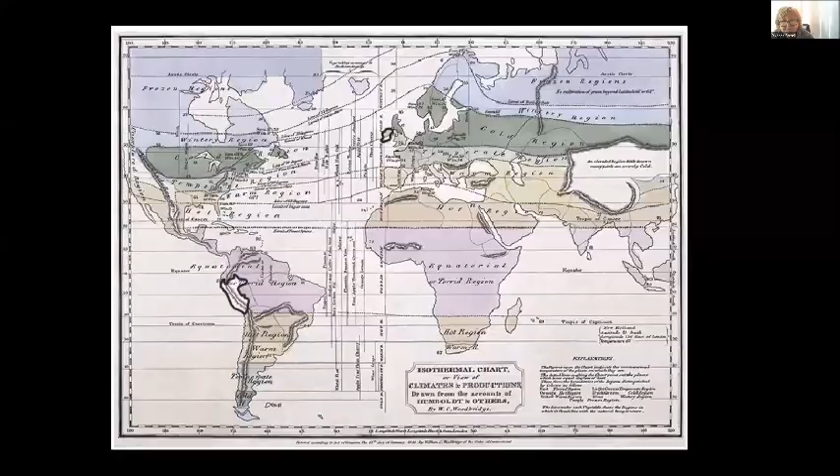But for us, and the discussion today about place, it's also about the future of sustainability and how buildings respond. The first project, which I will show, is one that we finished recently.

It's in the City of London. On the bottom of this image here is the River Thames down below, and then you also have the buildings around. These are the law courts, this part of the City of London. And we won a competition for a new university building that was on a site 55 meters facing onto a very ancient public space or open space in the City of London called Lincoln's Inn Fields.

And across the way from us was a very important architectural building. It's the John Soane Museum, which is a museum free to the public under Act of Parliament by Sir John Soane in his time. The house is now, if you like, a sample of his kind of architecture.

We were very aware that we were building a building with 55 meters, part of the whole enclosure of this public space. It was a competition, and when we talk about place and education and ethos, in terms of place, each project is trying to find some sort of kernel that anchors it in its location, so that each place magnifies the beauty of its difference.

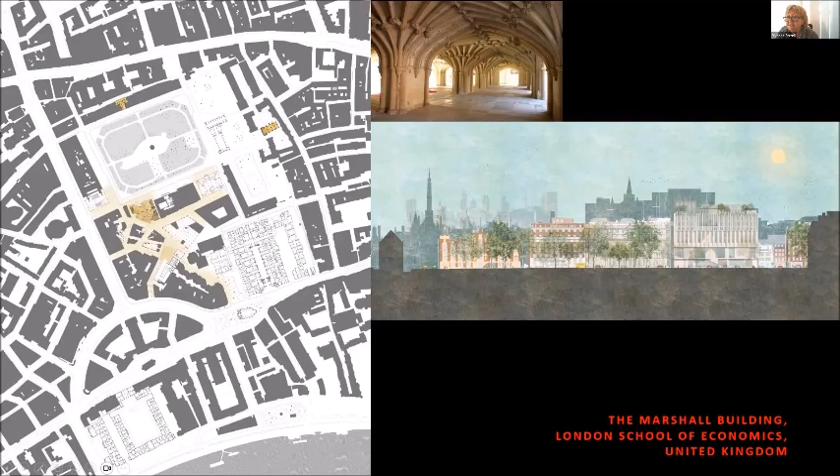What we did was separate what was needed. We pushed the teaching spaces up and the research spaces up, with the research institute on the roof. We put the big sports rooms down below ground, bringing light down to them, and we liberated the free space underneath, like the underside of Lincoln's Inn's little chapel that we made.

This is the structure that holds the building above, and you actually move within the structure. So here you're on Lincoln's Inn Fields - the ground is sloping slightly, going down to the River Thames, to the south. We made this public space where you move up through the building in terms of the research offices up to the roofscape, and down below is the big sports hall.

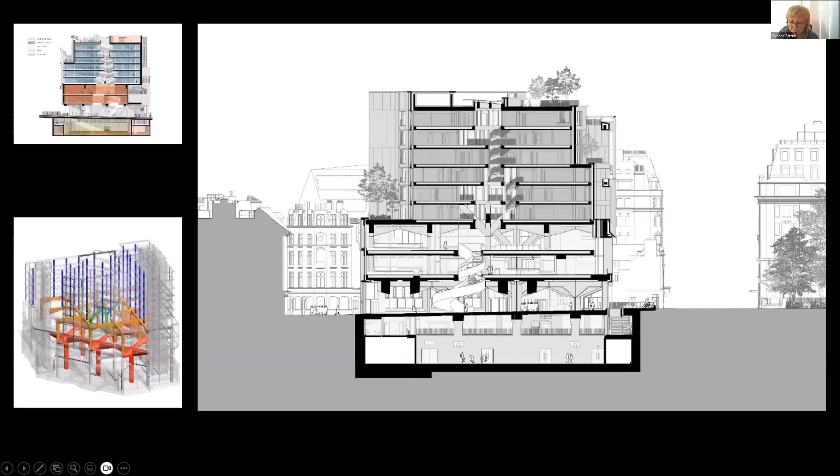So the smaller office spaces take smaller structure - there's 3 different kinds of structure in the building. Here we have the facade, which is the 55 meters of elevation to Lincoln's Inn Fields, the main entrance, the free space, the teaching rooms here, and the research offices up above.

One thing that's really important in this case is that because the facade was facing north, and because the sun is from the south, we didn't want a very dark, shadowy main elevation. So we made this like a lantern so that the south light could come through and shine into the northern space - you're down in the opposite, we have our sun to the south, you have your sun more or less to the north.

And also where we're using these fins to catch the western sun, to bounce light as deep into the plan. The second image is one of the other entrances that links into the streetscape of London. And here on the right-hand side, you're in the free space, the new space that was invented.

In terms of pushing the need up higher, the need down below, we make a space which is multifunctional. This is both an area for students to gather, a place where exhibitions are held, a place for lectures, but it has this multifunctional possibility within its repeated structure.

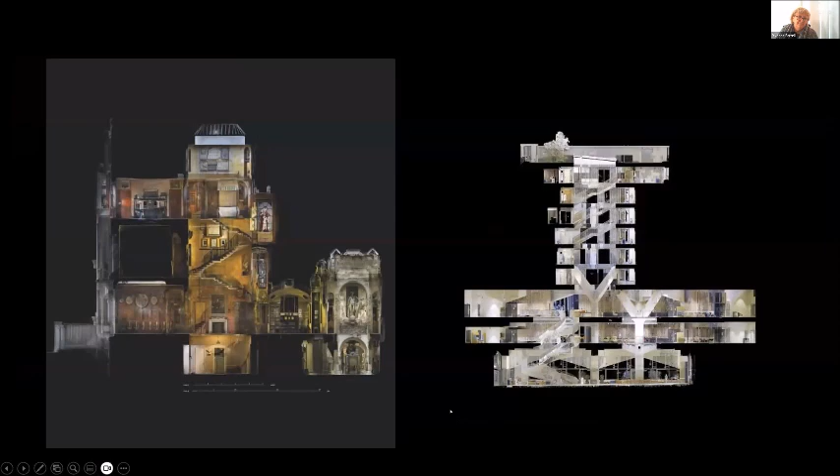I'll finish and hand over to Shelley in a minute. I mentioned earlier that across the space was John Soane's museum. He was a practicing architect, but also a teacher of architecture. This house has incredibly beautiful and intimate spaces as you move up through the building. This was a photographic section, which we thought was really very beautiful. It was at a time in London when the pollution was so dreadful that people could hardly see more than 10 or 15 meters.

The amount of pollution from smoke, from domestic fires and from businesses within the city really made it a dreadful place to breathe. One interesting thing about John Soane was that he was a very good friend of the painter Turner, and that friendship may explain the yellow color he used to brighten up the gloom of London at that time.

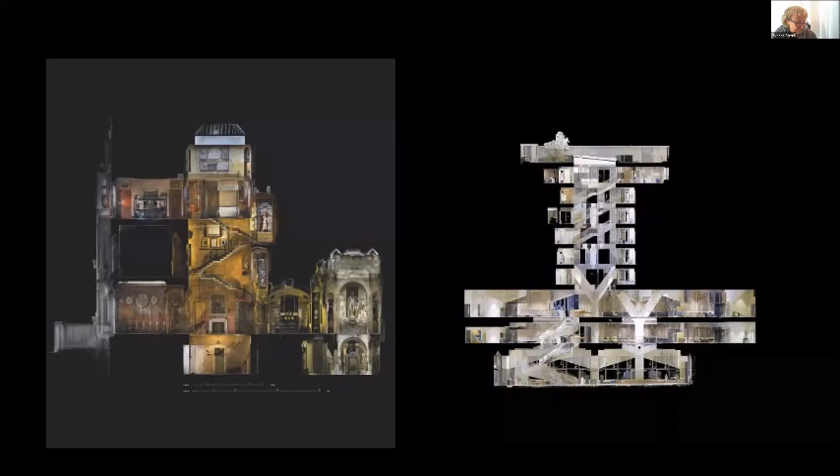What we loved about this section was the roof lights, because Soane was a master of light. We were invited to do an exhibition in the Soane Museum called Neighbors in Space and Time, and we connected our drawings with what had been done in the late 1700s and 1800s with Soane.

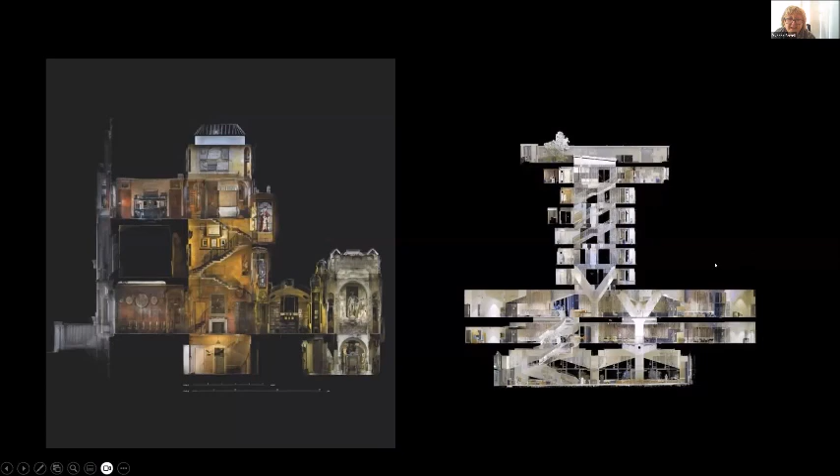We made the point cloud section of our LSE building. On the right-hand side you have the space sloping down towards the river, the staircase that moves up, the 2 stories of teaching, and the structure with the void moving up and bringing light down from the upper levels. We thought we'd share this interesting technique of the point cloud section.

Shell? This next project, the Anthony Timberlands Center in Arkansas, is our first totally timber building. It's quite difficult to build in timber in Ireland for many complex reasons. This was a competition we won for another university, and it's a fantastic idea the university had: to make a building which would reinvigorate the timber industry in this area, because Arkansas and Fayetteville are full of forests.

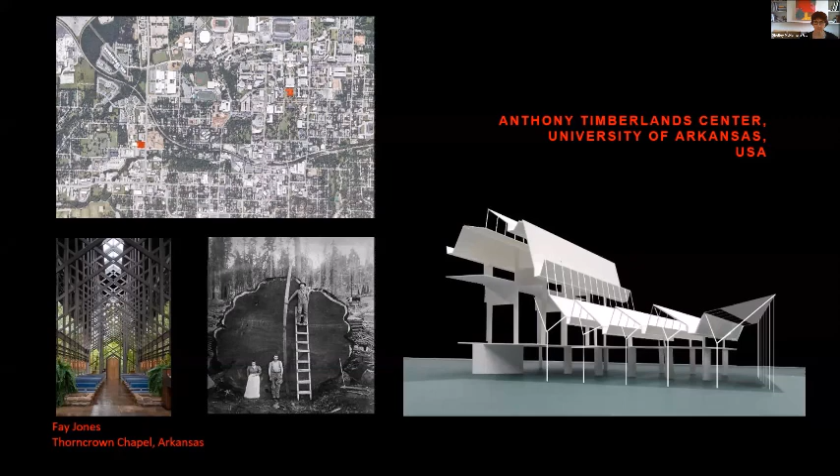Next image. Sorry, Shell. Yeah. Looking at how this has developed and become more simplified, the dancing roof rises up to the taller teaching spaces overlooking one of the main streets in Fayetteville on the right-hand side.

Ivonne, you might point. Yeah, sure. There's a sunken workshop which can be seen from the street, a big open workshop with heavy machinery and big spans.

And then the roof comes to a very tight point up above in relation to the teaching spaces, but we felt this crack of space was really important. Sometimes it's really interesting to have a small crack of space where a student can look down and see the floor, the active floor of the joinery, let's call it.

What's also interesting is on the floor above the double height working yard towards the street is the auditorium. And they wanted this auditorium to be central to the life of the building. So we had to think about a way of supporting that without obstructing the machinery down below. There's lifting cranes and big machines.

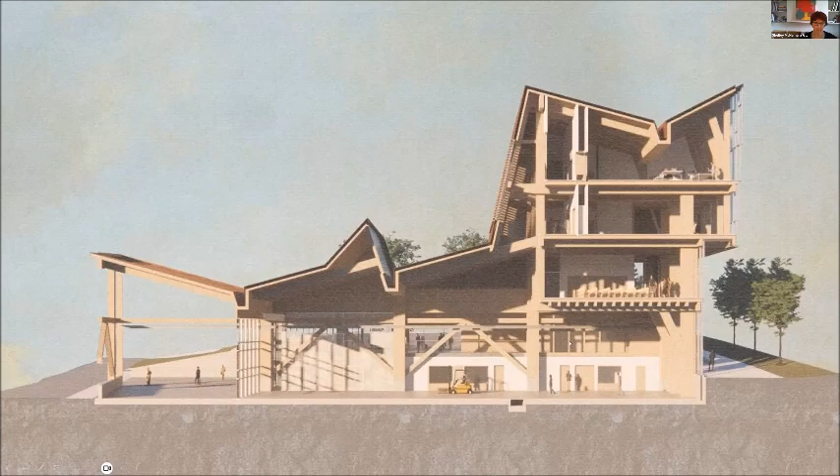The fantastic thing about working with timber, so different to working with concrete frame or monolithic concrete structures, is that you really see the structure, how all the elements work, like the skin is removed and you see all the bones and the workings of the forces. The section on the right-hand side shows one of the principles of these big totem poles of columns, which reach right up from the ground to the upper level.

And then in order to hang the auditorium and get it to float above the big working yard, we used the good old-fashioned queen post truss, which allowed us to place the auditorium within view of the noisy working yard, while not obstructing the activities down below. And when you see the north lights, the big columns reduce in size as you move up. We're really enjoying this project.

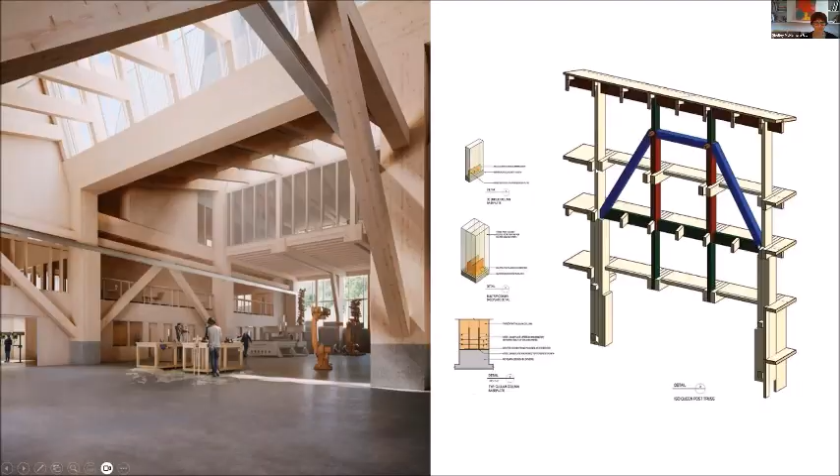Then there's how you make a timber building deal with all the fire codes in Fayetteville. There was a steep learning curve for us because the codes are different in every country, and there were certain points above which we could not use exposed timber and where we changed to metal. This was the case both internally and externally.

What you see here is the workshop climbing up over the teaching spaces, making a civic edge onto the public space of the city, so citizens and visitors can see into this manual work. We'll come to it in Lima - it's something we learned from the UTEC project, the joy of seeing the nitty-gritty of a university when it's related to making. One of the really important things educationally about this brief was the wish for the university to place a space of making and craft in the middle as a central educational tool, because many universities are becoming more academic and more detached from the mess of making.

In relation to Toulouse, which Yvonne referred to - Toulouse is this extraordinary city in the middle south of France, a red brick city, with World Heritage elements within it. The left-hand side plan shows a medieval wall heading towards the huge Garonne River and the Midi Canal, which joins this river. We're at a place where the old Roman city joins what we call the new city.

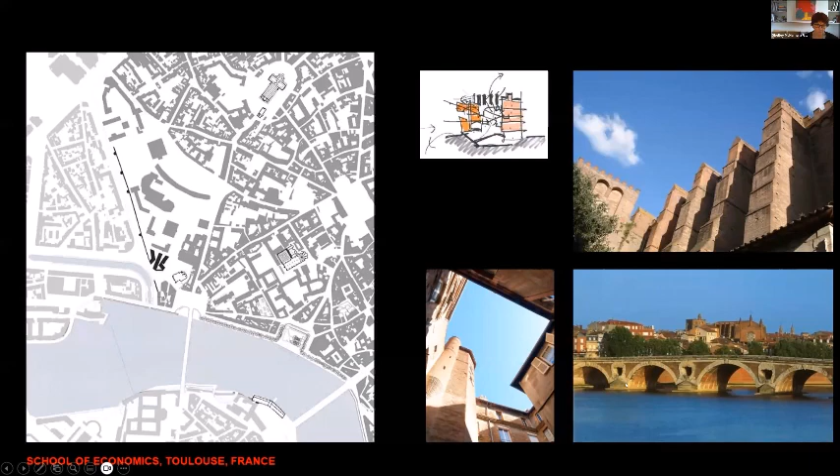What we found, in terms of the program, not unlike the University of the London School of Economics, where there are lecture theatres, graduate and postgraduate offices, and research offices and professors' offices up above - one of the things we found here was that the lower levels form a kind of perimeter plan wrapped around a central circulation space. And then as we move up, there's a certain metamorphosis that happens where the building comes free.

Our building contractor called this building the Butterfly, which we thought was really interesting because it has a similar kind of metamorphosis. We didn't really realize we were doing it at the time.

It was the program, a very dense site, again, how to make a sense of space within a dense site. And also one of the important things we'll be speaking about in relation to UTEC is climate and how climate informs a project.

Here in this project, Yvonne could point on the plans, we have 6 fire escape stairs which form the kind of feet or sturdy base, the footprint of the building. That was a way of us making surface at a scale which somehow connected with the buttresses of the church, but also staked out the territory behind which the university could occupy.

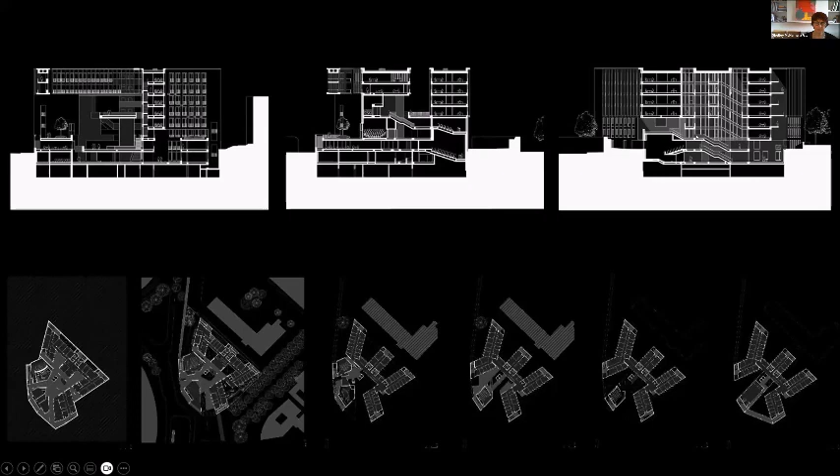Next image. And the climate in Toulouse is very, very hot in the summertime and not so cold in the winter. It has a lot of wind. It needed to be protected from wind and rain.

But as we learned from the building in Milan in the early 2000s, we found that it was possible to make collective space within the world of a university, to make it not inside, not outside, but tempered space, which is comfortable space.

That's something where people say you can't do that in Ireland, but we don't believe that, because many of our monasteries in Ireland are a fantastic example of what a place of education can be, where you make a cloister around a garden and the ceiling is the sky and you're protected from wind and rain. It's such a beautiful place to be, that space between inside and outside.

And here we have this need, or wish, to choreograph the beauty of the city, that these big openings we make with the sky cloister up above and terraces down below would make windows at the scale of the city, so that the students can ponder over the questions to hand, but also are absorbing what's happening in their city.

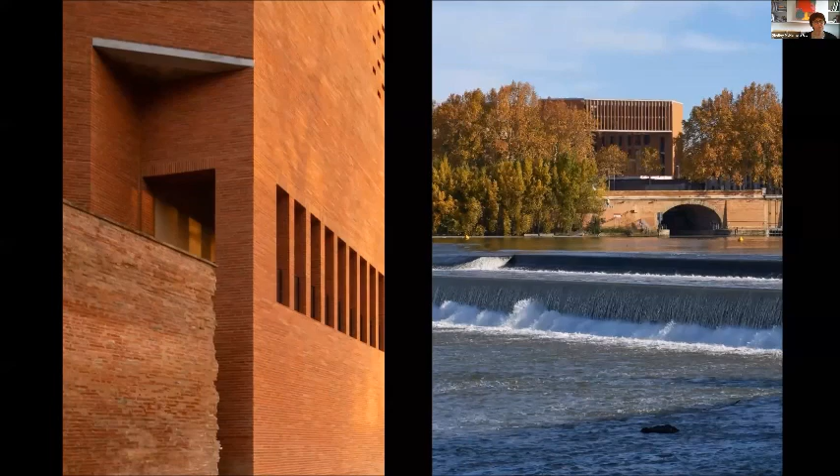So, another image. And we needed courage to actually take our place beside this beautiful medieval wall. And we wondered, what should we do? Should we stand back? Should we stay away? And we decided to come as close as was absolutely possible.

But we've used the same brick. And we found this brick, exactly the same earth, exactly the same dimensions. This brickyard about 1 hour from Toulouse. And they have this beautiful yellowish, soft colored mortar, which we used.

We found that in Toulouse, and perhaps in parts of Paris, our engineers hadn't built a solid brick wall in a very long time. There were codes which we needed to engineer these walls in a way which would meet the current codes, but would still have the quality of the medieval wall. And the image on the right just shows this big window to the courtyard from within the world of the university. Next image.

Moving to UTEC. And I think this project started in 2011.

One of the questions we found very moving, actually, in your email, Manuel, was you said: we were particularly interested in your Peruvian work, based, we imagine, on an approach to Peru, on ideas of what Peru is and what Lima is, on what architecture should be in Peru and for Peruvians here in Lima. In that sense, we are interested in learning about you, and through you about us, or at least about how we can be seen architecturally, urbanistically, and in terms of landscape.

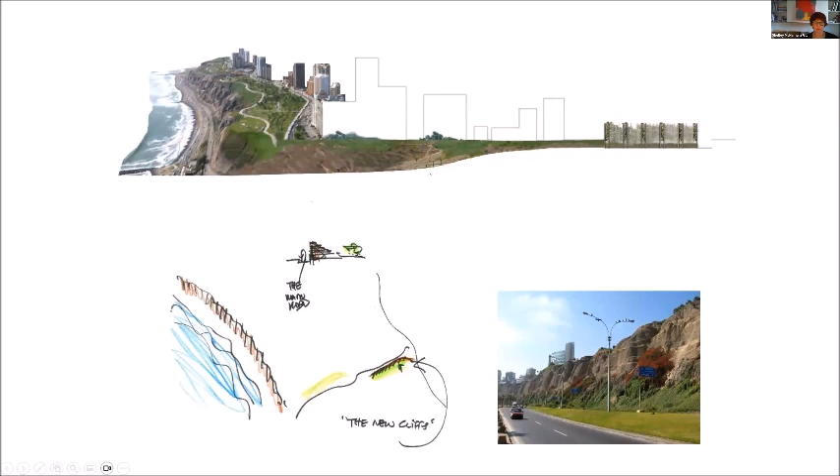We started thinking about the students as being the spectators overlooking the city, to Barranco on one side and the big city on the left-hand side of the sketch, where there's the hostile motorway, and how we could stack the teaching spaces like a series of big staircases, terraces stepping up the site, and that the roof of those teaching spaces could become gardens.

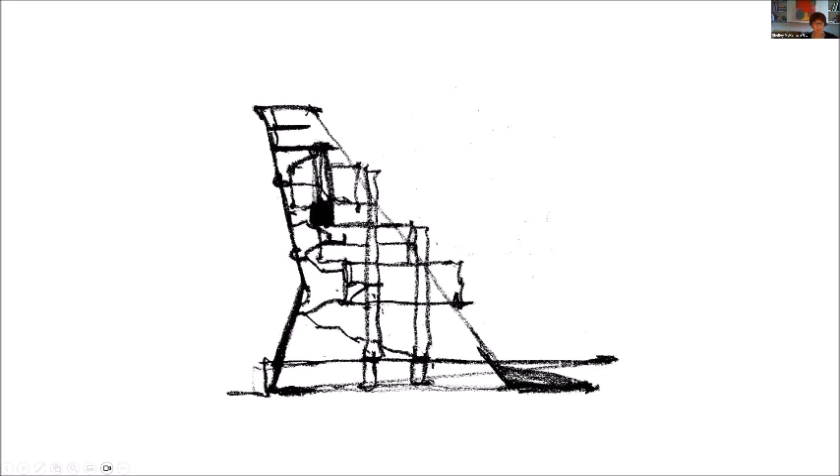If we go to the next image, we were also thinking about the wonderful terraces of Machu Picchu and other sites in Peru, and how we could take from that.

In a sense, we found an essay written by William Curtis, really interesting, where he talked about platform and horizon. He talked about Machu Picchu not having the middle ground, so to speak, that there was the intimacy of how people inhabited the landscape, and then there was the breadth of the Andes as a different scale.

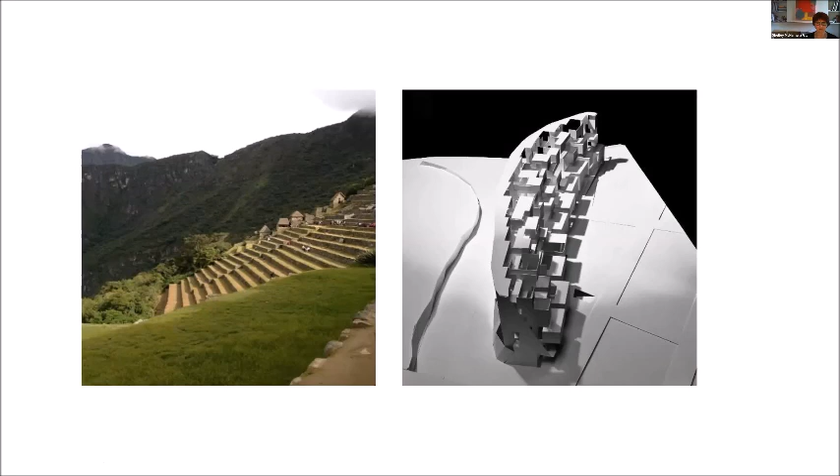We were thinking that this structure could make these intimate classrooms attach themselves to the infrastructure, and that it would make a kind of safe and secure place within the bigger city, and then relate to the big horizon. So it was an idea of the intimate and the heroic, let's call it.

Then looking at the section as it developed, this was still a competition section. Probably one of the things that was really important is that the strategy of integrating landscape into the form was very important in terms of getting permission for this project, because there was a need for a certain area of landscape. In Lima, we discovered if you make a raised terrace and you're open to the sky, it counts as being outside - this had to be navigated through the system.

You see the ground-hugging lecture theatres and some workshops at the lower level, and car parking going into the basement, and then big workshops exposed like a gallery, so that students could see what was happening and what was being invented. The spaces get smaller and smaller as you move up the building.

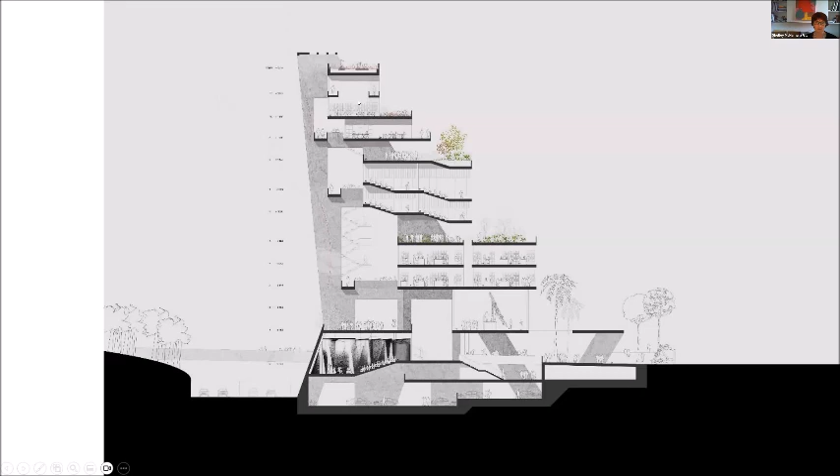We were looking at the light, trying to capture - we were looking at the light of other architects' work, taking from both Brazilian and Peruvian architects' work, and the way that you think about the integration of structure with infrastructure, with architecture, and what kind of university could that make?

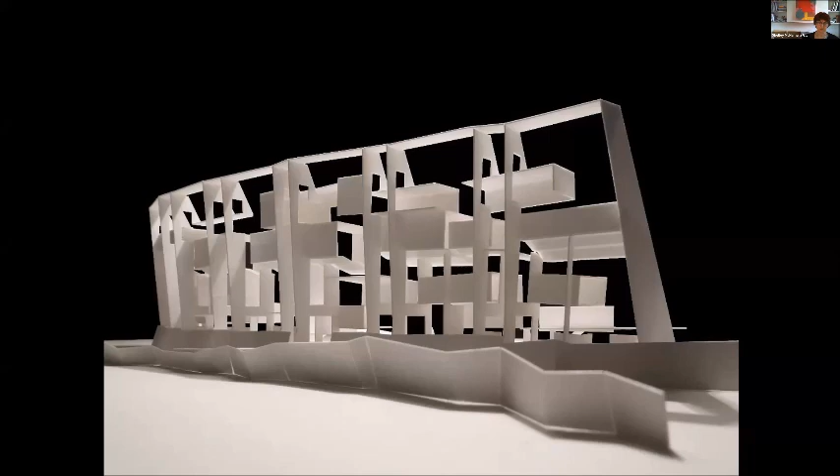The study models of making this three-dimensional, it's like a viaduct or an inhabited infrastructure, and the climate - a bit like Toulouse - but the climate was such that the prow of this building faces the Pacific Ocean and could tap into the breeze from the Pacific Ocean, but it's such a moderate climate that the only spaces we would need to make internal were the teaching spaces, so that the air and the light could flow through the building.

Looking at that in more detail, how we could attach the teaching spaces - these were very early study models of the way that we were thinking.

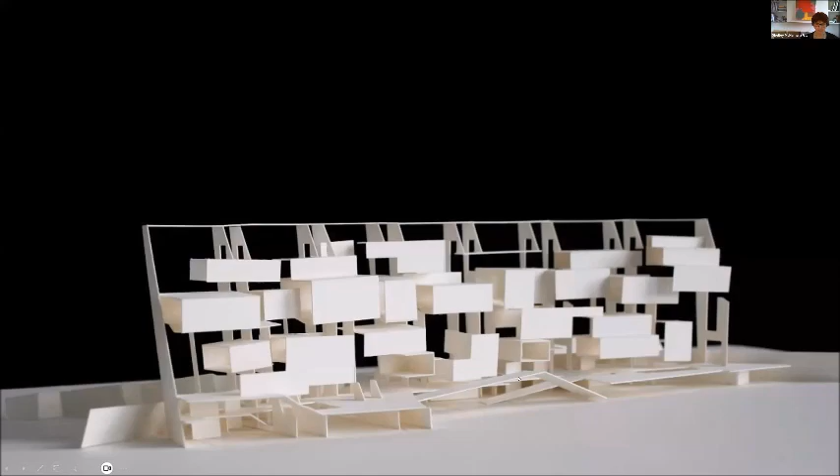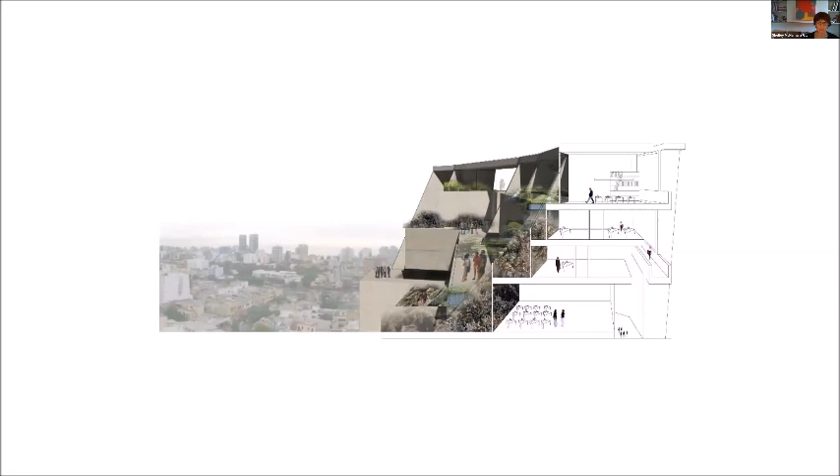How the landscape could attach itself like crevices, a bit like the cliffs, the way that the planting grabs hold of the earth to grow up the surface, the sandy surface of the cliff - maybe we could make something which would feel like that.

And how that might feel as you move through Barranco. These are all competition work. We decided, because you gave us a lot of time and you seemed curious about the way we work, to show you the development of the project and not just the finished result. So these are very simplistic in a way, but this is where the project came from.

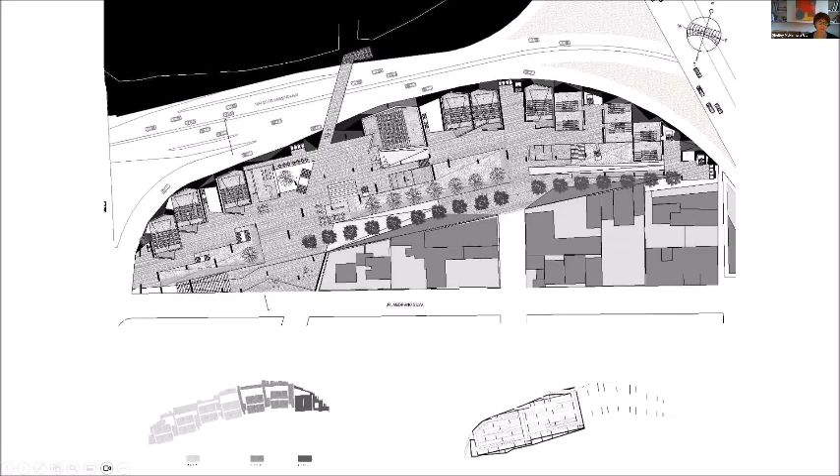Then the competition plan - we found it really difficult that we couldn't enter from the main road, and we had to make an entrance through quite a constricted space from the Barranco side. But we loved Medrano Silva - we loved backing onto the kind of bric-a-brac of the city on one side and the bigger world of Lima to the north. And this thing of making an outdoor surface within which all the big elements of the brief could sit, the lecture theatres, the things that don't need so much light, and they would make this wall a sound screen, an acoustic wall to the motorway, and relate to the south.

We took the fog into consideration in thinking about the competition drawings, that the building would disappear into the sky. We were very worried about how we could make a building which wouldn't suffer from the heat of the intense sun, but wouldn't be too dreary or dull in foggy days, because in Lima, when the fog comes down, it's really grey. But the light, the intensity of the light is so strong that this balance, we think, has been reached.

On the next image, we were thinking about the color of the earth and the color of the concrete. In fact, when we went back to Lima, we discovered that many buildings, we had thought of using a pigment to make that kind of lovely yellowy color, but many buildings built in the 60s have acquired that yellowish tinge because of the wind from the desert and the sand. It's really nice the way that happens, and the tone of the concrete is softened by the earth.

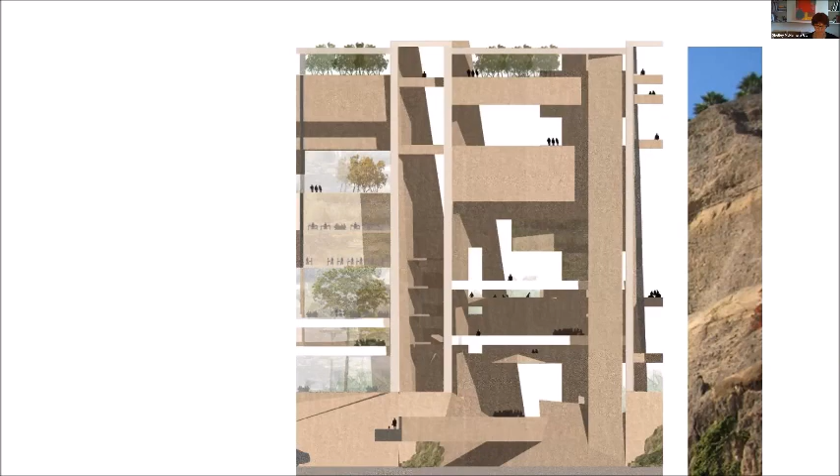the people that we have met, like Freddie Cooper from Lima, who trawled all over the world to try and get as many people to respond to the international competition for this project, and he's a very convincing man. We did the competition, and we were unbelievably lucky to win this project. It's a really important project in our lives, not only for the actual building itself, but also for the people we have come across in making this building.

So in terms of the Huaca, to be an architect in a city means that you're more than a tourist, because you're part of the lineage of the making, the actual objects. A building is an incredibly optimistic collective endeavor, the amount of people involved.

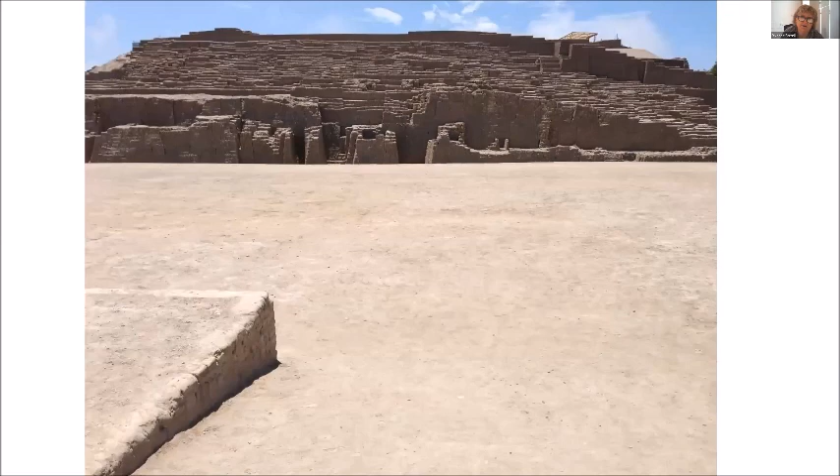So these huacas were something that we are learning from, something so humble and individual put together. It's like a metaphor for the good aspects of human life, that when people put their minds together, these individual bricks of clay put together make these monumental terraces, which are unbelievably impressive, these kind of pieces of modified sand or modified clay.

For us, it was also developing an architectural attitude, saying that architecture is the new geography, because at the scale since 2008, more than half of the world's population now lives in built rather than wild conditions. This is real proof of the continuity of human beings, and some absolutely beautiful things made with incredibly modest means to create these beautiful terraces.

Also, just after we won the competition, we were invited to participate in the 2012 Architectural Venice Biennale, curated by David Chipperfield, whose theme was common ground. The common ground could have been interpreted any way, and what we wanted to express in participating in that Biennale was the common ground of influence, that we had just won the competition for UTEC in Lima.

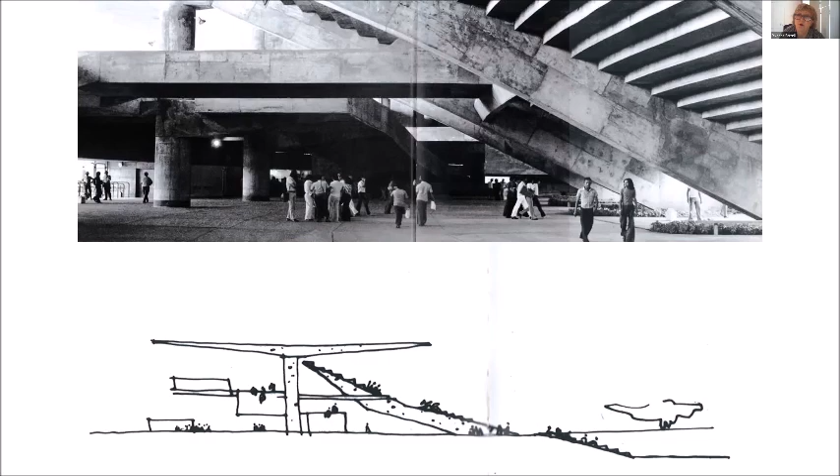We were looking at places with climates similar to this part of Peru. We had over many years looked at the amazing work of architects in South America, and this section in terms of the stadium, we were looking not just at the stadium, which is the focus for football, but also the social interaction that can happen under the umbrella of Mendes da Rocha's structure, where underneath is where people gather as well.

So we contacted Mendes da Rocha, whom we did not know, to ask permission to twin our architectural thinking with his work, since his work was really important. And he very generously said, go ahead and do what you like.

Annette Spiro, a Swiss architect who for 15 years had traipsed around South America looking at Mendes da Rocha's work to make a book, introduced us, and he was unbelievably generous to us.

So we did this sketch, trying to synopsize our working together. The line was really the earth. The horizontal lines going down are the timber structure that holds the buildings of Venice in the mud of the Adriatic. And then you get the various islands. These two pieces here are Machu Picchu and also Skellig.

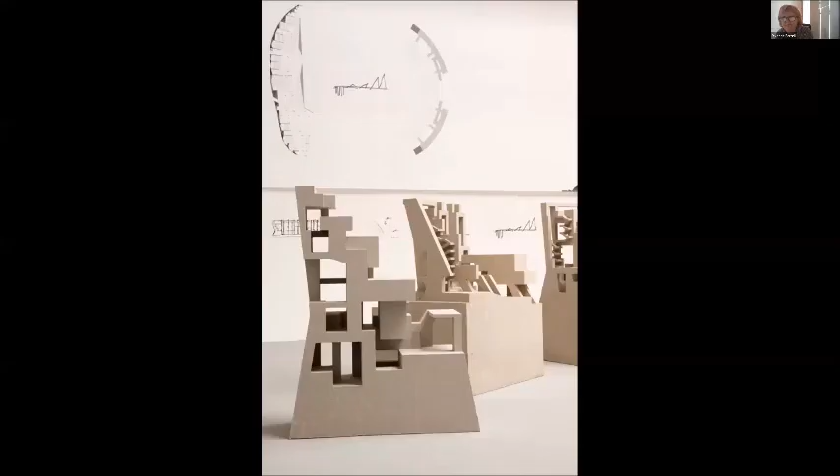For the 2012 Venice Biennale, as we began the project for UTEC, these were on the wall. You can see that little hieroglyphic of the line, the foundations, and Machu Picchu in the distance — the little sketch, the beginning.

Also us looking at UTEC on the wall at the same scale as one of Mendes da Rocha's projects. These large 1-to-20 imagined ruins, as Shelley has called these models, were us looking at the potential of what UTEC could be, about circulation — the embryonic jump from idea into spatial idea.

And here we have a range of, in the common ground, some of Mendes da Rocha's projects — we made this beautiful church of St. Peter's, which we commissioned a sculptor to make in limestone.

It's interesting, she was making the church — the church of Peter, upon this rock I will build my church. And as she built the model, the actual structure of the building held the limestone as well.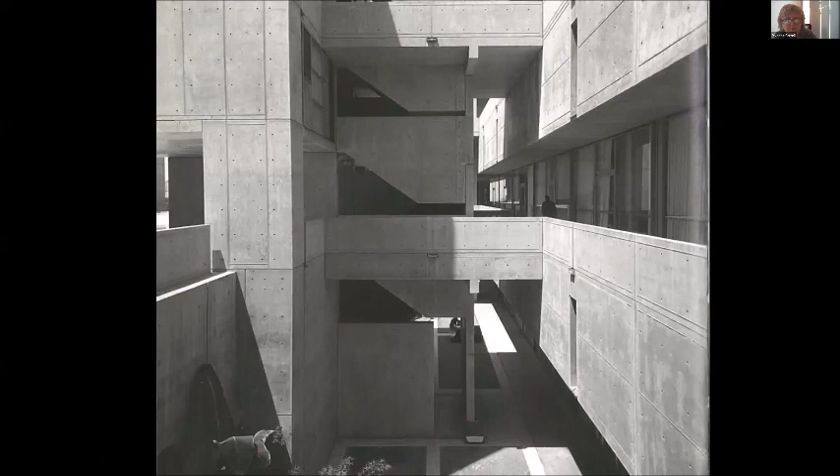I think it's important for us to say how much going to visit and standing in amazing buildings resonates in the physical and intellectual memory.

This is part of the Salk Institute down in La Jolla by Louis Kahn. What's amazing is the shadow, the carving, and the surface. It's an incredibly beautiful building where you normally look out at the setting sun to the west, but there are also these gorgeous carved shadowy spaces that make this precinct for the research scientists.

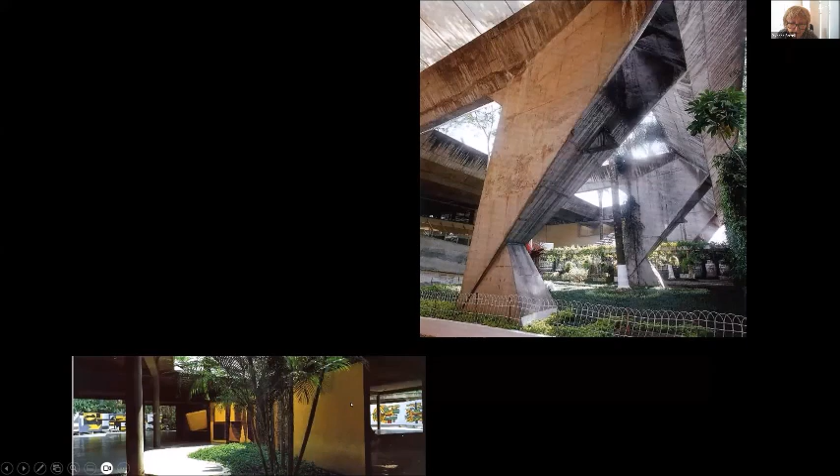We were also looking at some of the drawings we were examining, these incredible structures where inside and outside is blurred, where structure and space and architecture, structure is liberated to be itself—going back to the London School of Economics, where the big pieces of structure are the places that you stand. You are aware of the structure, that it is the twin of architecture, the spatial enclosure.

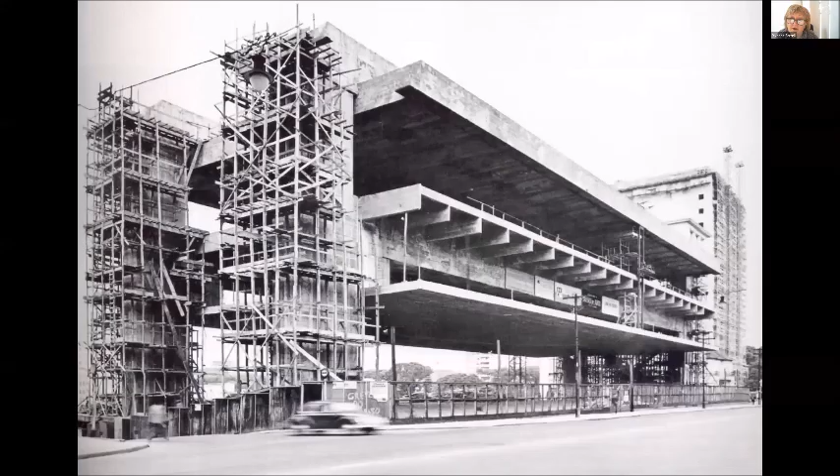Things that really helped us over the years, looking at the bravery of this incredible project by Lina Bo Bardi—this span looks as if it's suspended from the sky. When we were doing Bocconi University, where the span is 25 or 26 meters, the courage that architect had to make this public space with a hovering structure above is part of the treasure of architecture, that all of us can dip into this well.

And when we then won this amazing competition, we began with the fantastic team of local architects, local structural engineers, GCAQ and Carlos Casabonne, and a terrific range of people. We were also working with environmental engineers.

These drawings look in plan, looking at how the sun actually revolves around Lima and the various seasons. What is it like to be 12 degrees down from the equator? I mean, you're nearly at the equator—it's incredible, the sun dances in a certain kind of way.

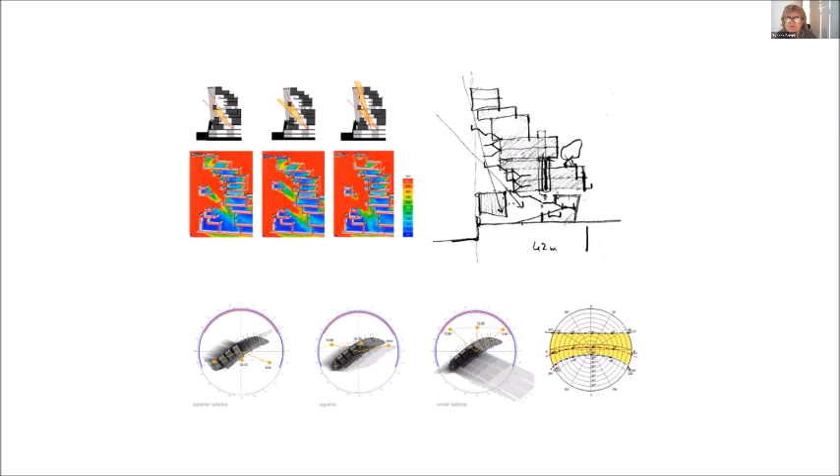Looking at the final section and the reality of the building, it's in-situ concrete combined with some precast concrete walls. We were dealing with the construction industry in Lima, which was really interesting, and we learned a lot. We discovered a very extraordinary fact: that the largest users of cement and concrete in Lima are related to domestic houses.

People making their house extensions in concrete, because that doesn't stop. So you have organic cities where they keep continuing to grow up and sideways and outways and backways—it's a kind of organic world in many of your cities.

But here we're using concrete, and it's quite similar to Bocconi in a way. We have something like a 20-meter span between the main staircases, which are the escape stairs, which again form the kind of primary bones or skeleton of the scheme. And then every 10 meters, we have an intermediate scale structure.

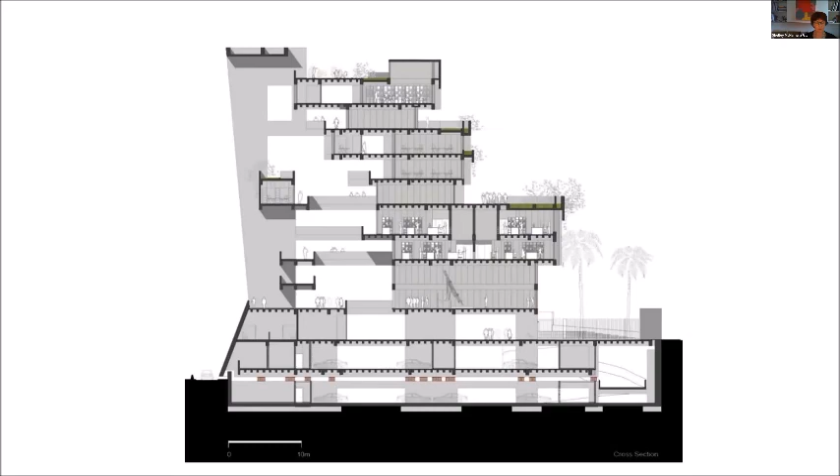Looking at the plan, we talked about the banana-shaped plan, and you see the 20-meter span everywhere the staircases happen, and then the intermediate scale. Because we have this shape of site, there's no linear axis. You can't see from one end of the building to the other because the walls keep shifting. So it feels quite solid, both when you're moving horizontally as well as vertically, which is very different to the Bocconi University, which had a 25-meter span but is much more rational and orthogonal.

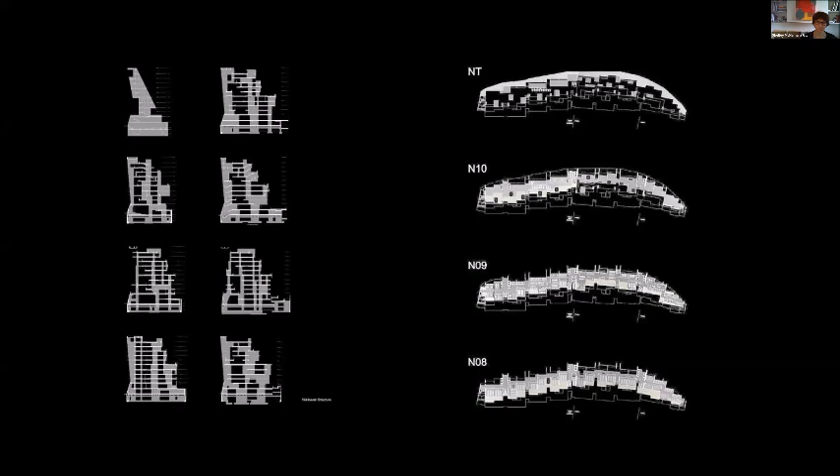And all these different sections you see on the left are what Ivonne calls the DNA of the project, how it keeps changing each time because it's related to the rooms that abut the primary structure. Sometimes it's open, sometimes it's a big room, sometimes it's a little room, sometimes it's a terrace. So it's like an X-ray of the spine of the project.

And then the extraordinary experience of building in Lima, the scale of the operation and the speed of construction, and the fact that it's so highly organized. You're supposed to be a third world country, and we found that there were...

Real kind of revelations. First of all, in the brief there's a theater and there was a cinema, and there was an idea that the client, Eduardo Hochschild, has a big art collection, and that would form part of the experience of the building. At the opening of the building, there were some really moving descriptions of what a school of engineering should be, that it should include the creative, experimental, artistic approach, as well as the scientific and the rational approach.

But the way the building site worked, I think there were like 2 or 3 buildings happening in parallel with all the different cranes, and they were moving up in parallel. We'll look at the program shortly, but it was a program we didn't believe. The health and safety and the organization was really impressive.

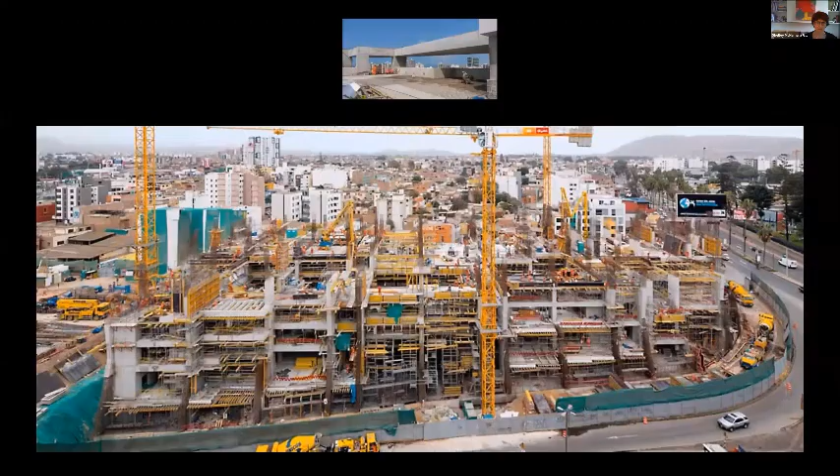It was just an extraordinary thing that just took off, and we were so far away. We had Alejandro Shell architects looking after this project, and they were brilliant. Ivonne and I would visit for one week at a time. But it was like this thing took off, and we had to keep up with it. It had a momentum of its own, and it was really exciting and really impressive.

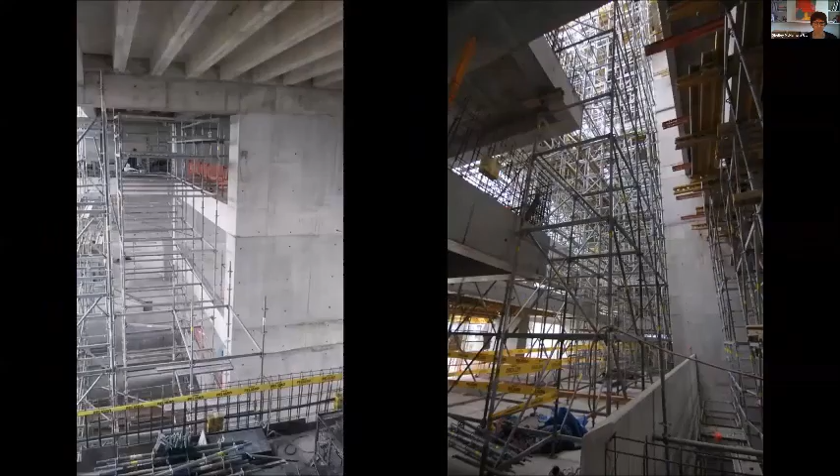Just seeing the whole scale of construction, the difficulty of constructing a structure like this, the amount of scaffolding—it's a kind of crazy project. How could anybody have let us build this building? But it was a really exciting thing to see it being revealed.

And then the spaces that started to emerge. When we visited on one particular visit, the whole scaffolding was down, and we were struck dumb. We couldn't speak. The hair stood at the back of our necks because it was something else.

It was kind of funny because when the scaffolding came down, we didn't meet our client very much, since they had managers and people looking after the project, but we were invited to lunch, and we thought, oh my God, there's trouble here. But what happened was he was really excited. He could not believe this happened, even though he had seen it being under construction. He kept saying to us, how did you do this? How did you think about this? How did you invent it? That's quite a hard question to answer over a short space of time, but it assumed another kind of life, and it really shocked and surprised us in a good way.

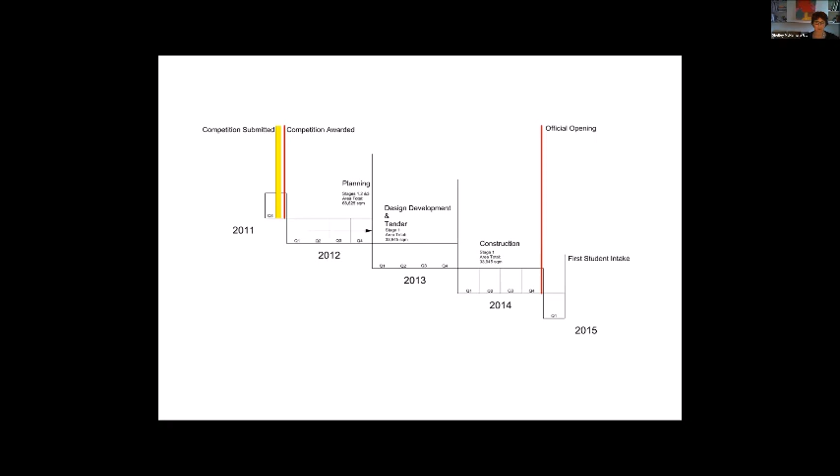But it was really the determination to make this university for young engineers of top quality, and the importance that education is held—it's given such an importance within Peru, and how it's seen as the way forward, which it is.

Next image. And is this me, Ivonne, still? Yeah, another few, and then you're—another few.

Okay, again just talking about the workmanship—this folded wall which forms the base of the project and forms the kind of buttress to resist the noise of the traffic and the danger of the traffic, and it's kind of like a protective wall. It was quite complex to make in terms of its three-dimensional quality. We were really adamant that it would have this folded quality, and that there would be a crack at the base where planting could grow and that it would become like a cliff.

We also were quite hard on the contractors at times, and we were very worried about the concrete and how it would feel in the end—maybe we just keep going and look at it.

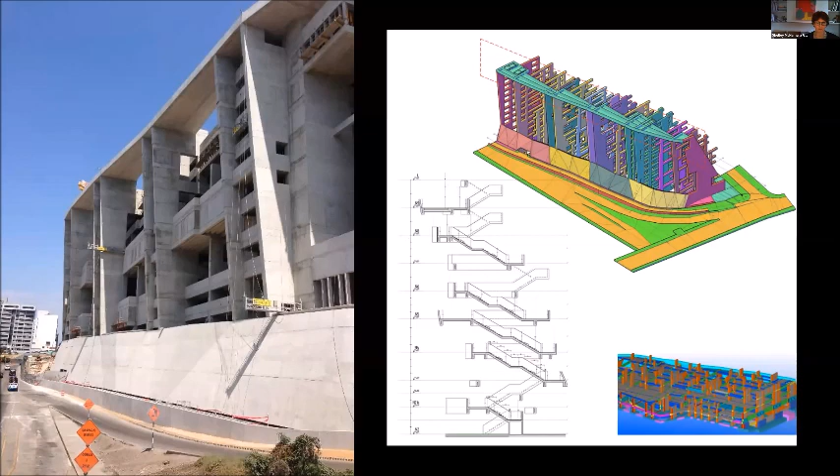The next image. And there was one day when we saw the difference between the motorway side and the barranco side, and the stepped terraces which are not fully planted yet, and then the kind of bric-a-brac of barranco, which was so important for us to experience, and the proximity of this existing neighborhood and this new university. It's abrupt, but we felt it was really important that this institution arrives in this place.

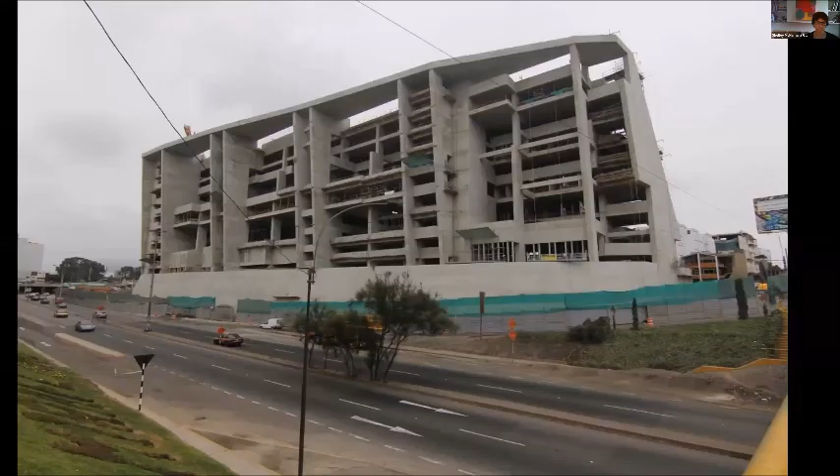Next image. And there was a day when we met with our contractors, and it was at a point when we were becoming more confident about what the final project would feel like. If we, maybe I'm jumping a number of points at the same time—

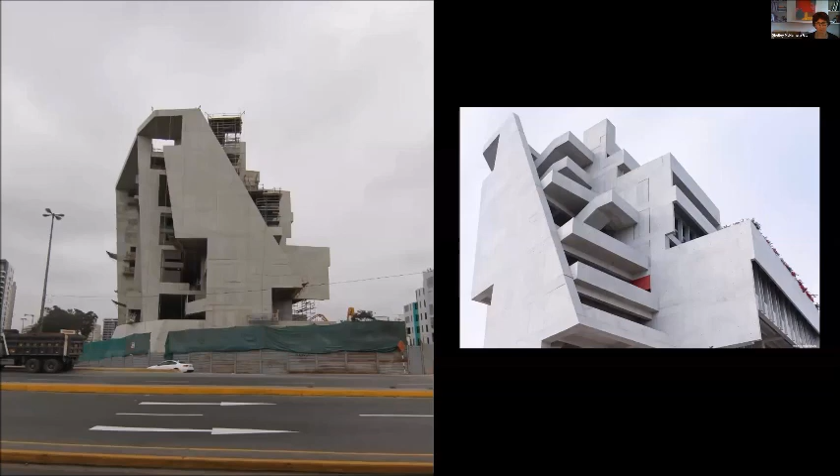But if we look at this image and just see how porous it is and how it feels like a very open building from the outside, but if we continue and look at the interior, we might see how it comes to feel really solid within the interior, that when you're in this interior space, it really feels like you're in a solid space.

And we really wanted these classrooms and laboratories to be visible. Sometimes the students move on the motorway side, and sometimes they move quite close to the classroom, so the circulation keeps changing. And as you look along the length of the building, because of the stepping of the site, you don't get a clear axis, or a clear line of vision, either vertically or horizontally.

Next image. But one of the things we found at one of the site meetings—we had to say to the contractor, look, this is looking really good, and we really compliment you on your work. It was a great point for us to be able to see this. Part of it was because we were getting used to the fact, on our visits, that the building was quite robust to withstand perhaps misinterpretations of drawings, and there were pipes arriving in places we never expected them to arrive. That was quite funny, but also quite serious. In the end, we just found that this is a tough baby, let's say. This will survive, and that was really important.

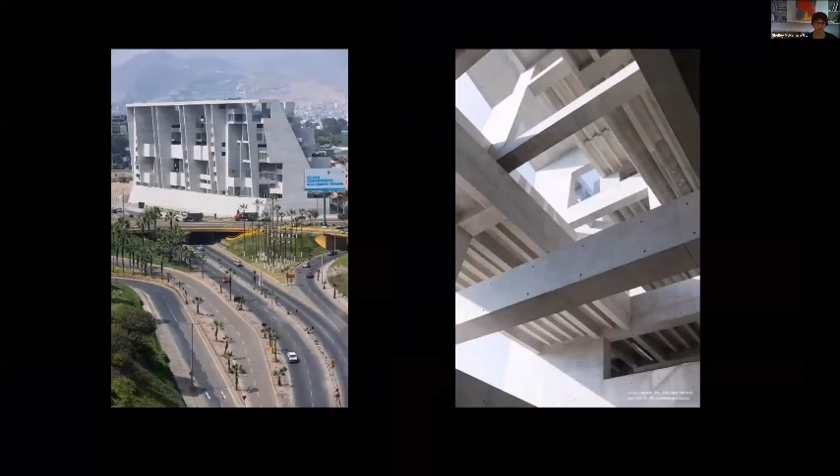That goes back to some of what Ivonne was saying about part of the experience of building in another place is the people that you meet and the people that you work with. And here you see the sense of this being an open, porous structure.

We know that some people in Lima find this building too tough and too hard, and actually we've heard people say, well, what is it? Is it a football stadium? We think that's quite interesting, because we're very interested in challenging given typologies. We're not certain that a university has to be a certain way, or that universities can't occupy very different kinds of structures.

And then from within, when you're looking up, you see the sky and you have this mass of structure, because this is seismic. This is no joke. This building moves and sits on seismic isolators.

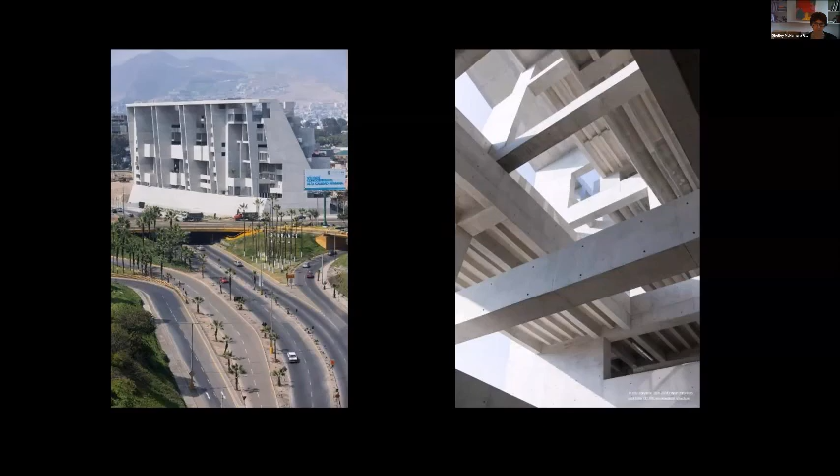At this point, we're coming to the last section of what we're presenting today. You're looking up the valley at the building completed, and time passes. What is really interesting is that it's important to go back to the fact that this, when it was built, was for a new university. As time passes, universities then have different requirements.

It's very interesting now that we're involved again with Shell Arquitectos, also again with GCAQ, adding to the second phase of UTEC. Alvaro Mina is also again the project architect. Shelley described the site in terms of it being about 360 meters long, along the motorway.

We were entering from here, from the Pacific side, coming in from the motorway. But also there was always an idea that there would be an entrance up here at the other end of the building, at the other end of the site.

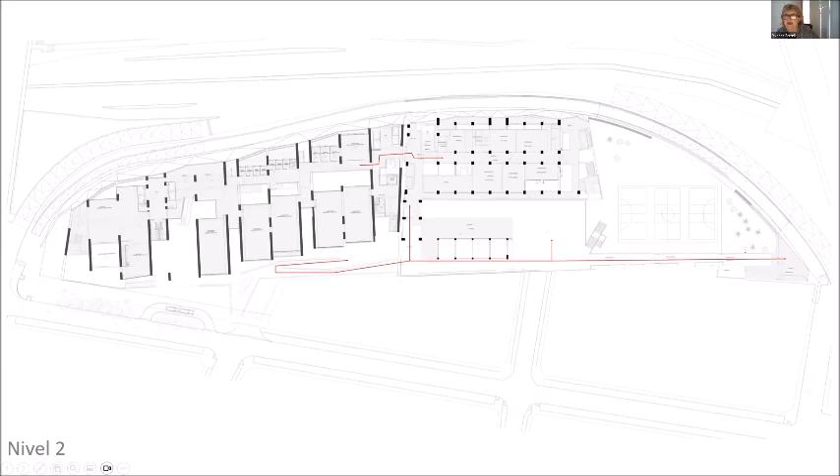What is really interesting now, this red line shows this new entrance that links both phase one, which we had originally, with ramps and connections waiting for the next part of the building to be added. So these are the connections. The red lines are the connections, the motorway access, the new building with sports ground, so that the needs are slightly different in terms of the building that has begun.

So here we have the new east entrance, which is from here, this wall, this screen, this concrete pencil screen defines the outer point of the site with the playing field. So we have the new eastern gable.

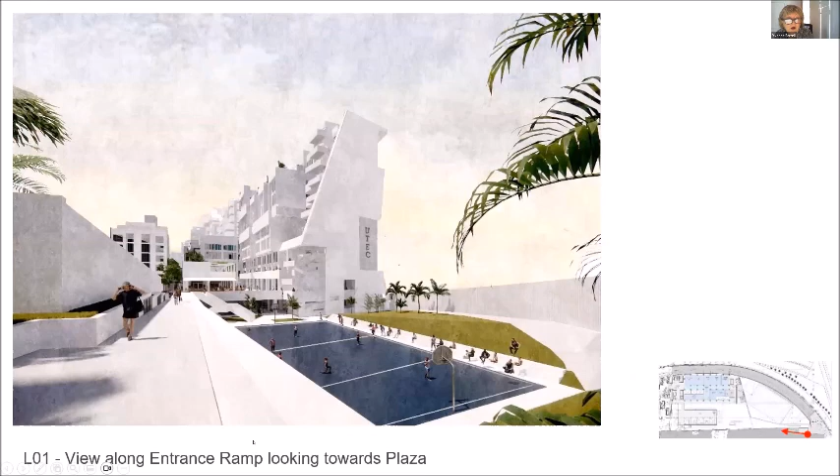You enter, you move along on this entrance ramp, you look down to the playing fields, and you see this new part of the building containing the motorway on the other side, the slip road on the other side. You move along here, tucked in underneath are changing rooms for the sports.

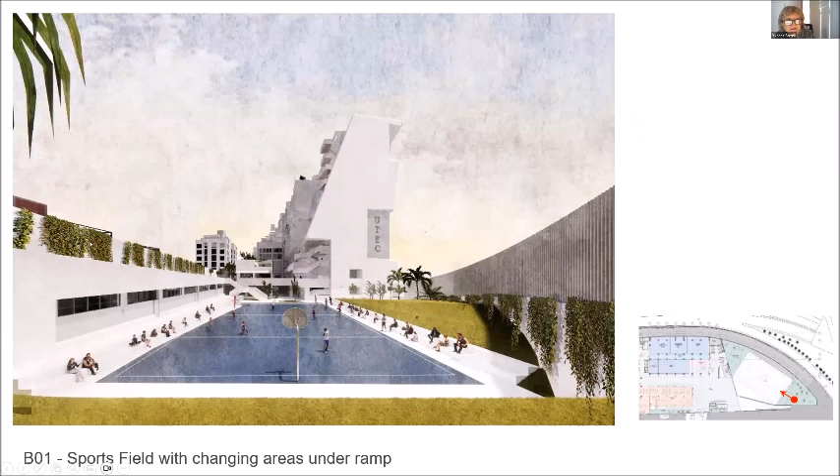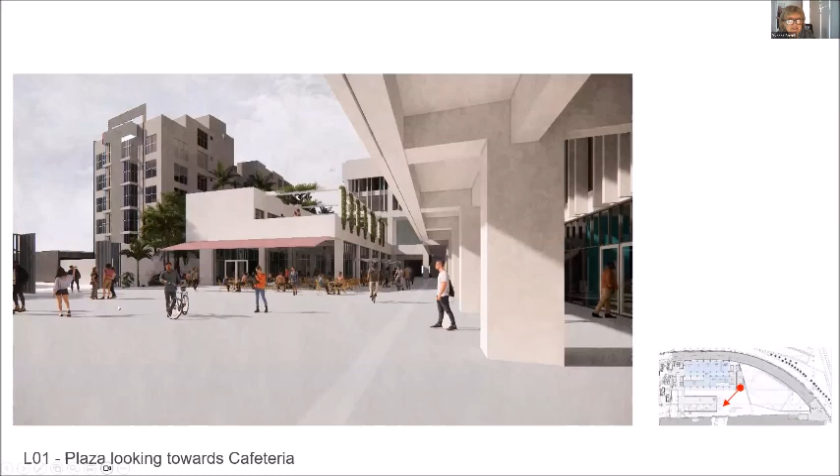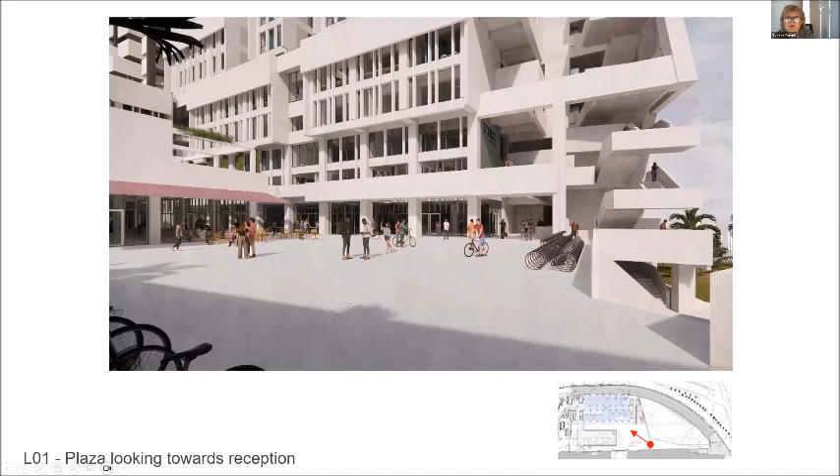As you move along onto the plaza, you arrive into this new area. This plaza is looking at the cafeteria, and you enter into this building. You see students arriving. This is the cafeteria on 2 levels, and you move, you can see the cafeteria, the main entrance. Here you'd move down to the auditorium further down and move up to the various rooms overhead.

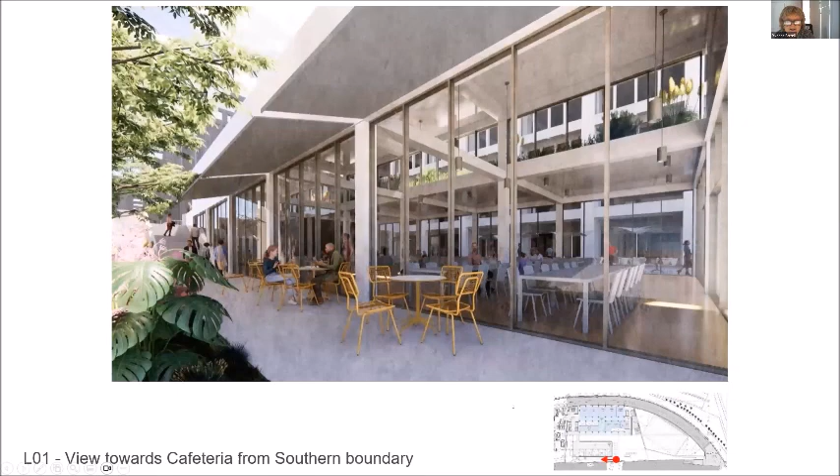Here is one of the routes from the east as you move along to connect to phase 1. You're passing by the cafeteria and connecting up to the ramps that exist in phase 1. This is where students would be fed and meet one another. There are 2 levels, with a terrace up high in the cafeteria.

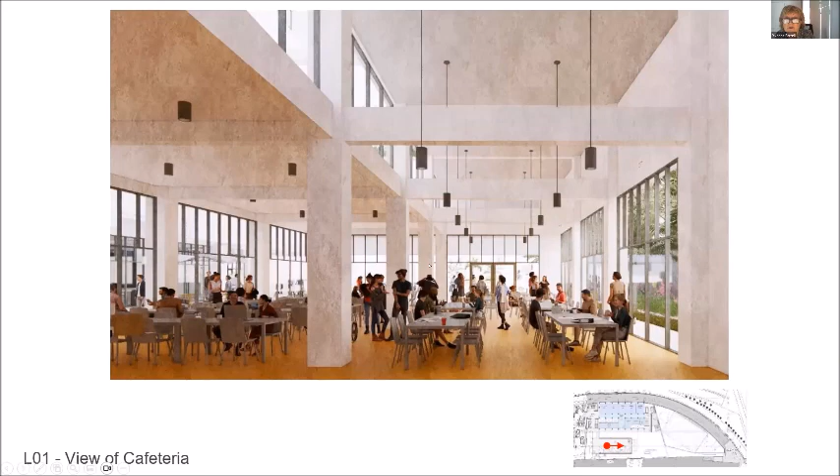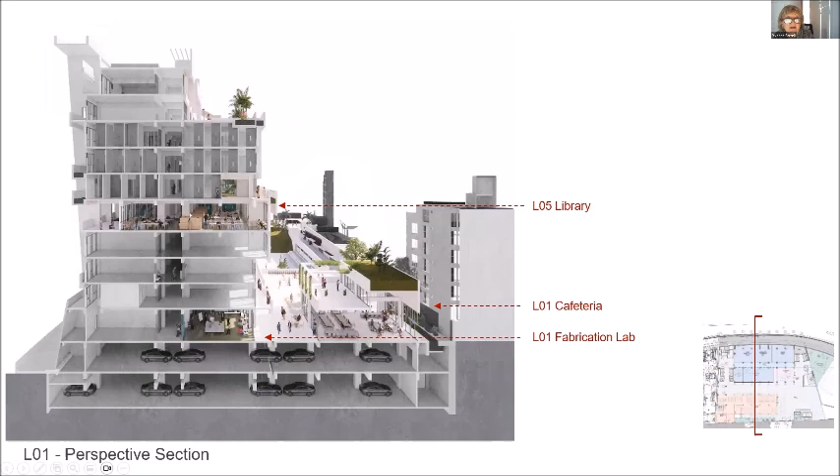So in section, what you have is the parking down below. You have the entrance coming along at the upper level, the changing rooms down below, a new plaza, a cafeteria and a fabrication lab in this position, and a library at this level looking towards Barranco and also to the city.

So the library is positioned at this part in the more compact phase 2, a double height space for the library. Students are looking down onto the new plaza, and also out to the city. And at the end, the last piece, Shelley was describing some of the staircases as they move down to the end before the playing fields into the aula at the end.

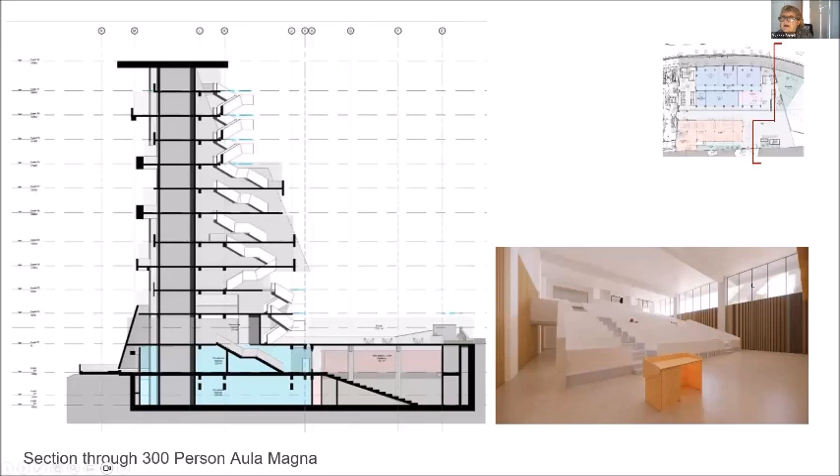This is an interior sketch view of the aula, arrived at the upper level. You drop down, you have clerestory light viewing out to the east. In terms of the existing phase 1, that wall that Shelley described, that folding, bending wall, the buttress type space at the base where the motorway is, the new extension goes eastward.

And the phase 2, so that's phase 1, you're looking out to the Pacific, you're looking out to Barranco, you've got the playing fields, and the new entrance.

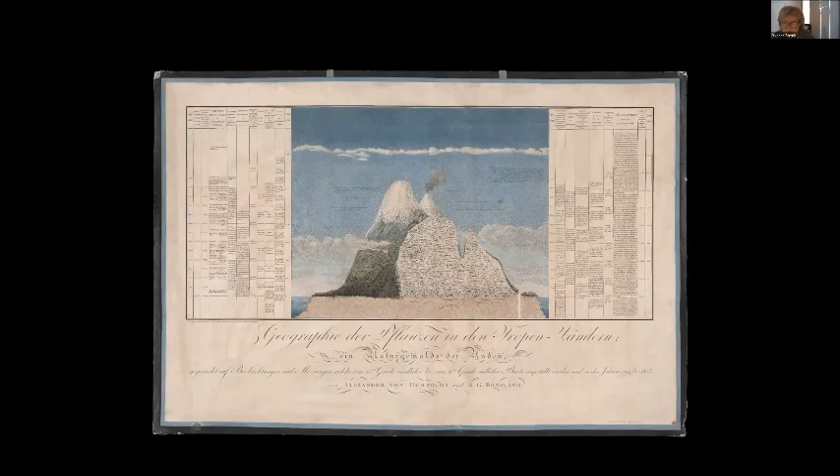And it was a great honor for us to build and to be building in your country. So from us, thank you, muchas gracias, and in our own native language, Go raibh maith agaibh. Thank you.

Thank you, Yvonne. Thank you, Shelley, for your really inspiring presentation on your inspiring work.

I personally would prefer to say I have no questions in this moment, I have to digest so much. And that's what I mean. No, you have offered us a very rich presentation, rich in how we humans are, how we feel, how we perceive, how we then think, how we learn from others, from the feeling of others, from the perception of others, from the architectures others did, who help us to understand too what we are dealing with.

Wonderful that you finished with Alexander von Humboldt, who, well, we consider in Latin America as one who discovered Latin America, who opened the eyes and our own eyes too for what the place is in which we live, and who did this being a global citizen. One of the early global citizens, somebody who felt at home everywhere in the world and developed a way of approaching reality, that at the same time was very humble, going directly to what is and seeing what is, what nature is, flora and fauna is, and representing it in such a marvelous way.